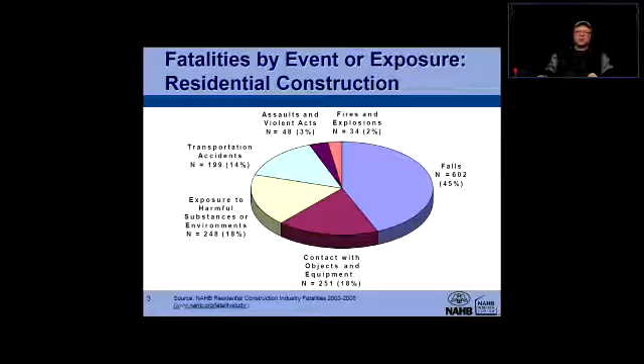So ladders first. All right, overview here. Now, just adjust this size here. Fatalities by event or exposure. This is a snapshot of some sort of statistics. It doesn't matter where it's from, pretty much it goes with everywhere.

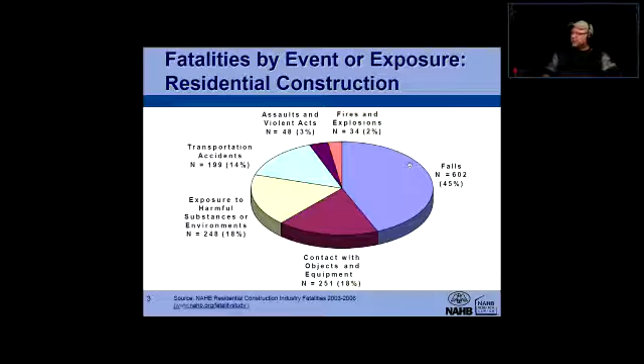Okay, so wherever the statistics are from, you're not going to see much difference. So what do we see here with the statistics? Fatalities, that means somebody died. All right, so falls, look at this, falls are about 45% of all the fatalities in residential construction. It's just residential construction, but it could apply anywhere else as well. So the big chart of the pie takes the falls.

Now, fires and explosions, you've got just 2%, 2% too much. Assaults and violent acts, we get 3%. Transportation accidents, anything involved with transportation, this would be 14%. Exposure to harmful substances, that's not a small piece of the pie, it's about 18%, and contact with objects and equipment, 18%. So that's fatalities, which means basically people have died because of accidents related to these types of events.

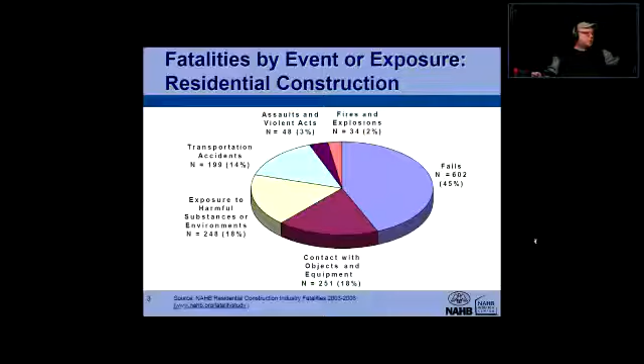All right, so as you can see, falls are taking a big piece of that pie chart. Now we're going to examine just the falls. So we're going to concentrate on the falls right now. So this is the falls.

So now falls from the ladders and falls from the scaffolds, that's what we're going to concentrate on, trying to make you safe, because falls from the stairs, you're using stairs all the time, so you're used to that type of device, if you can call it that.

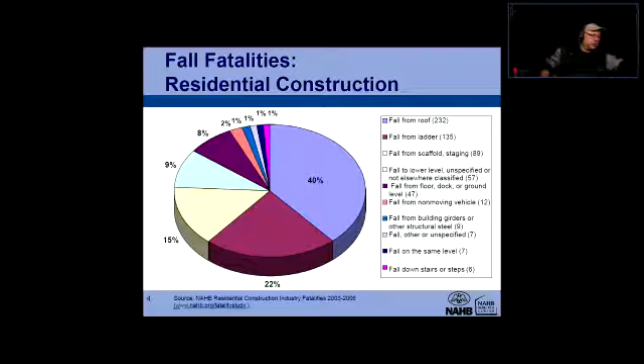When it comes to dealing with ladders and scaffolds, there's a high probability these things are new to you, and if anything is new, you have to familiarize yourself with it. This is what I'm going to try to help you with. So here's the ladders and stairway safety.

Now, common ladder hazards. So the dangers of... I'll be interested in seeing a pie chart about spring, summer, and winter fatalities in residential construction. You know what? Maybe I can find it for you sometime.

All right, so common hazards that are associated with ladders are listed in point form: improper setup of portable ladders, not 3 feet away, not 3 feet above the landing surface.

What is a landing surface? If you're trying to go onto a flat roof and you're going to put the ladder against the wall, that roof you're going onto is your landing space, the landing surface. Also, not securing the ladder correctly.

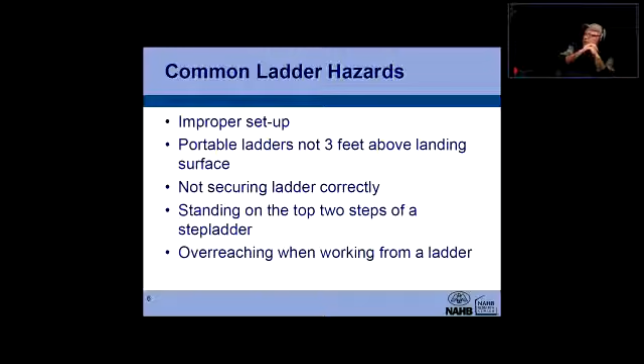Standing on the top 2 steps of a step ladder, and overreaching when working from a ladder. These are the most common ladder hazards, and we're going to go over some of them in more detail here.

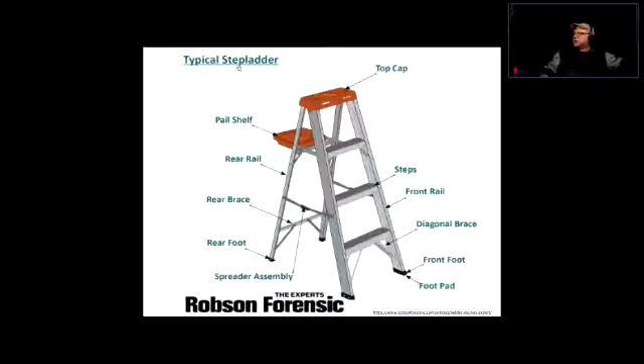First, let's get some definitions set up. This is a typical step ladder as opposed to an extension ladder. That's an extension ladder, and this is a step ladder.

Here's the top cap, right on the top. These are the steps. Here are the braces, front foot, foot pads, rear foot and pads, and here's the spreader assembly. Rear rail - these are the rails. Here's the front rails, here's the rear rails, and here's a pail shelf. And I've got the top cap already. So this is the terminology associated with the step ladder.

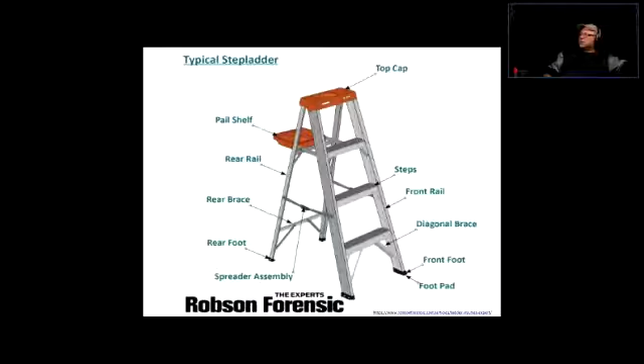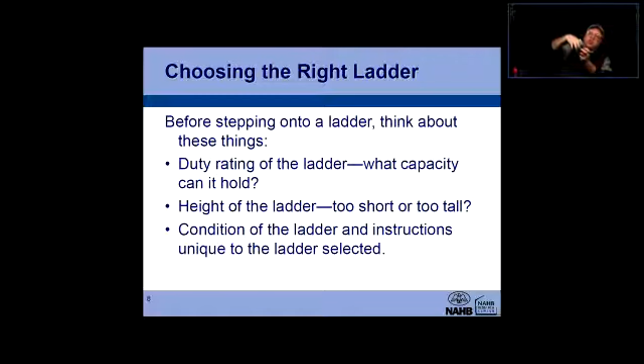I've seen in hardware stores telescopic ladders being sold. They fold down so you can put them in a trunk, then extend them to make a 10-foot ladder. What's the biggest hazard with those? Some of the locking mechanisms will be the weakest point of that ladder. You don't see what's inside those telescopic mechanisms, and if something fails with the locking latches that are supposed to hold it in place as you step on it, that will be the weakest point. That's just an example of familiarizing yourself with equipment and the hazards associated with it.

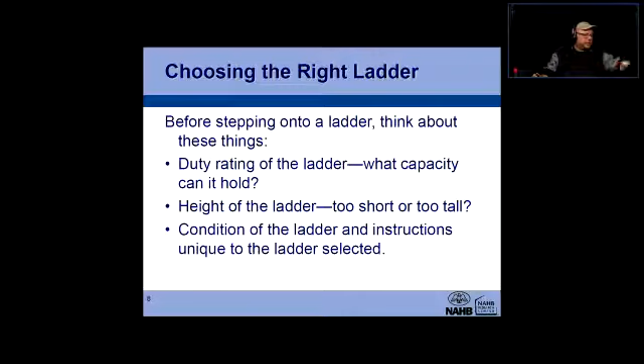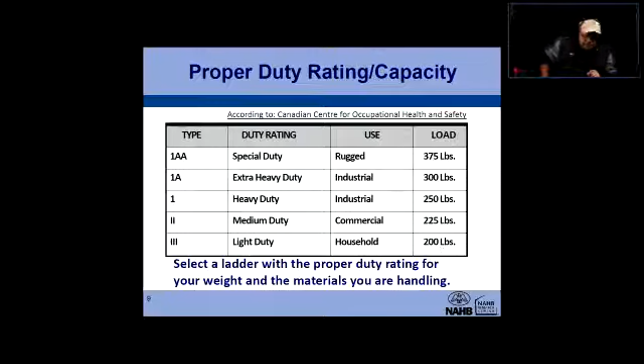So sad to say, I won't be able to use that ladder. Then there's a type 2, medium duty, used for commercial purposes, rated for 225 pounds. So sometimes I can use it, sometimes I can't.

Then there's a heavy duty ladder, industrial use, up to 250 pounds; extra heavy duty, 300 pounds; and so on. Special duty is rated for 375 pounds.

When it comes to buying a ladder for everyday work use, I've seen some people on construction sites using light duty ladders simply because they're easy to carry. When you have to carry that thing around all the time while running wires or installing devices above the floor, sometimes you have to climb on it, and carrying the ladder becomes a task. So some people choose light duty ladders, but they were told not to bring those ladders onto the site, and to remove them so nobody gets hurt.

Yes, sometimes it is heavier to carry. Some of the heavier duty ladders are heavier to carry, but they're much more safer to use, and they don't wear and tear as much as the light duty ladders. Select a ladder with the proper duty rating for your weight and the materials you're going to be handling. So it's not just your weight; it's whatever you're going to carry on that ladder.

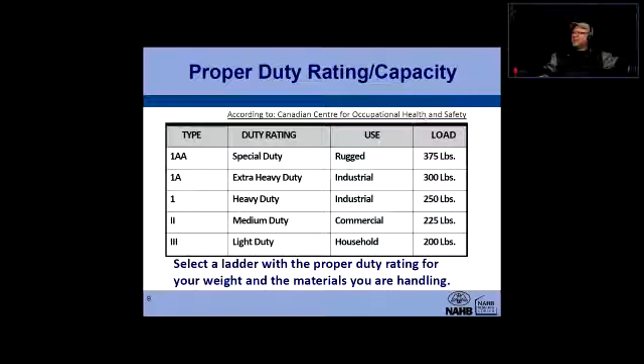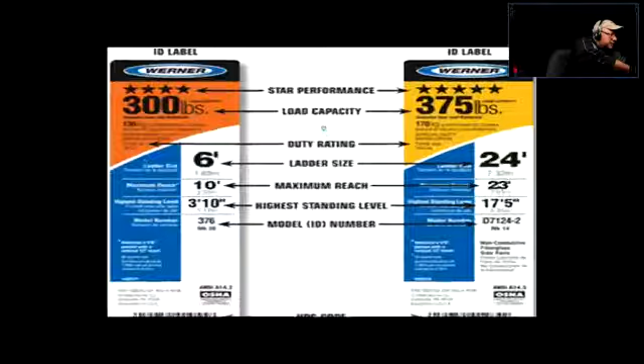You probably won't be able to see that clearly because I have this thing kind of... These are the stickers on the side of the ladders, labels. One is the step ladder ID label, and here's the extension ladder ID label. So you can see the rating with big numbers. This ladder is supposed to handle 300 pounds. That ladder is supposed to handle 375 pounds. Now here's the height of the ladder size. Here, 6 feet, most common size.

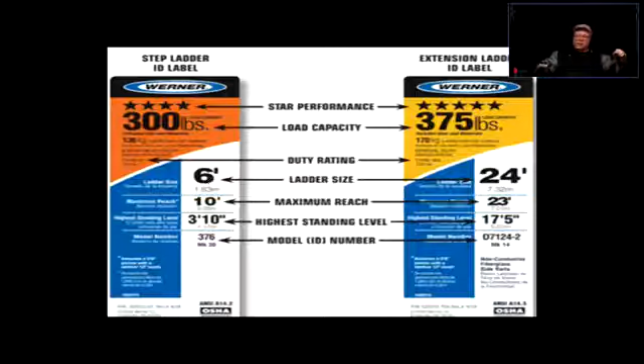Just as a side note, there are two types of basic trainings. One is working on heights, and whenever you go on any construction site, you should have the working on heights, so-called ticket, which means you have official training, you pay money for it, and somebody certifies you as trained. Whenever you're walking onto a construction site, the first time you're there, they register everybody who's working there, and everybody who is going to work on a specific site has to go the first day. They designate a safety training, and there's a safety officer on site who will sit you down in a room, play you some videos about safety, and you have to demonstrate a little bit of knowledge based on what you've learned, and then they register you as legit to work on that site.

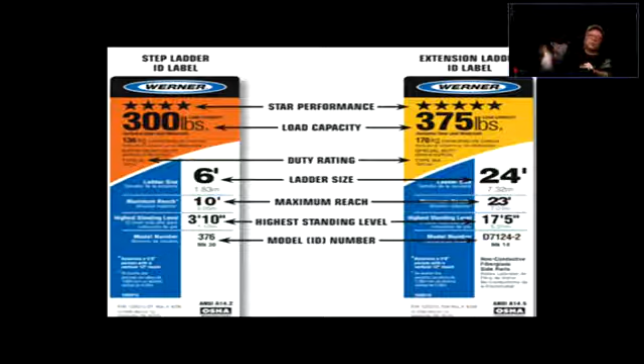It used to be called fall arrest, which is basically preventing you from falling. Now it's called working on heights. Maybe within 5 years it's going to change 3 times, who knows, maybe not. Every year or so the requirements change as we go along. So that's one thing, basically working on heights.

The other training used to be called lift ticket, maybe it's still called that. Basically that's using mechanical devices such as scissor lifts, man lifts, or boom lifts. I think the highest one produced for that type of use is 180 feet high, so that's quite high, and since you're operating a mechanical device, you should know something and be trained in order to do so. Now if you don't have the lift ticket, then you're not allowed to use that lift, which makes you less valuable as an employee.

If you're considering a career in this type of field, you should start searching for companies who train. Where do you search? Well, a lot of equipment rental companies offer on-site training for that. You have to pay money for it, but they do offer it. And if they don't, they'll be able to tell you who in your area offers that type of training. So that's the lift ticket.

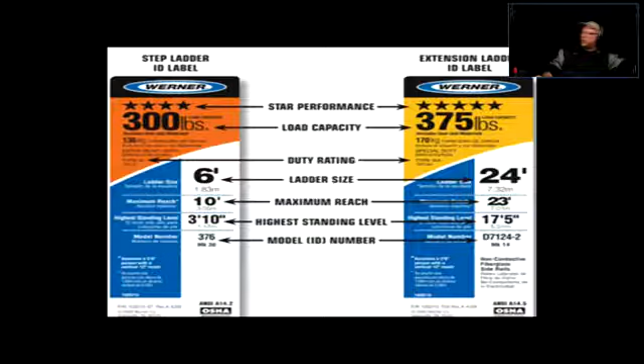And other ways, lifting devices. Let's see the time, okay, we're still good. Oh, whoa, whoa, whoa, all right.

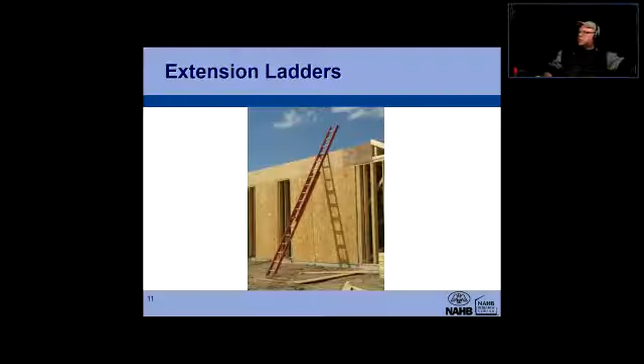So as opposed to a step ladder, which is this, we're going to look at something that's called an extension ladder. All right, that's what an extension ladder is.

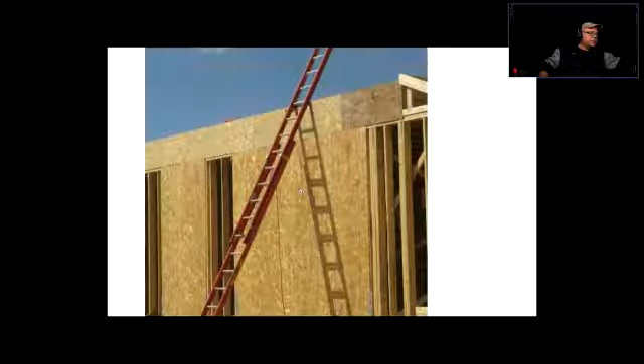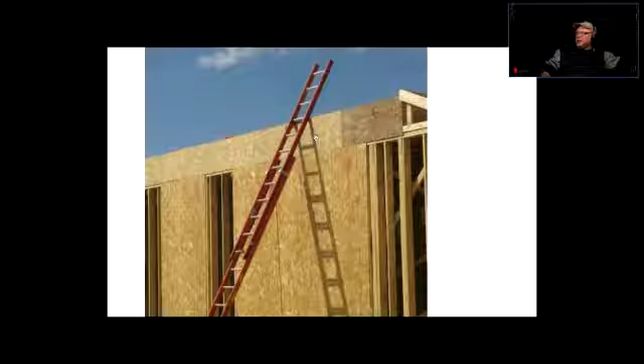And of course, if somebody is walking onto the roof, this would be the landing area, right? Notice how this ladder is positioned - not just tall enough. It has to have a certain amount of feet above the landing area for that thing to be safe, legit, or legal, for that matter.

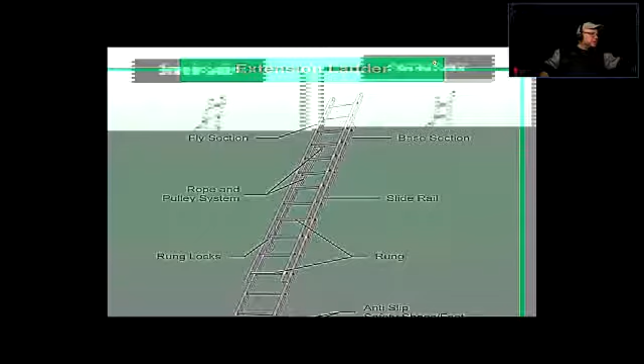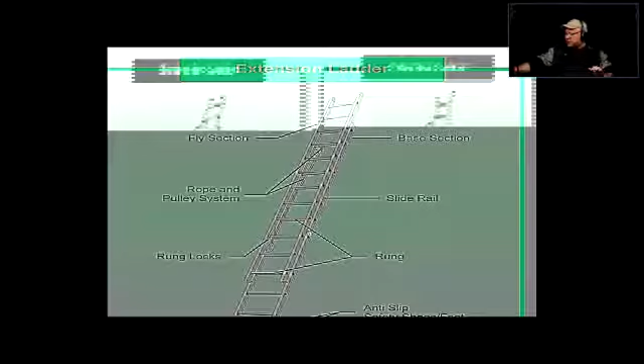Okay, so the parts of the ladder. Here's the fly section. So the extension ladder is basically like two ladders coupled together, right? And then you can extend one part to make this thing longer or shorter. That's basically how extension ladder works.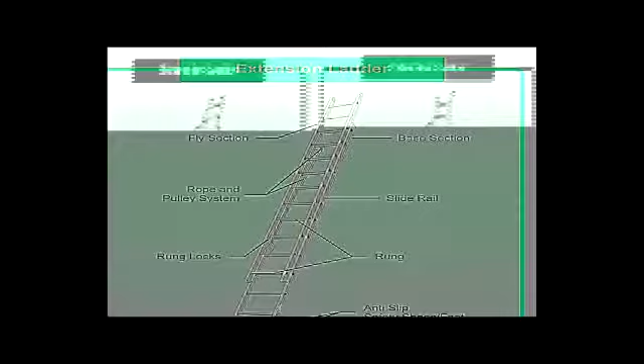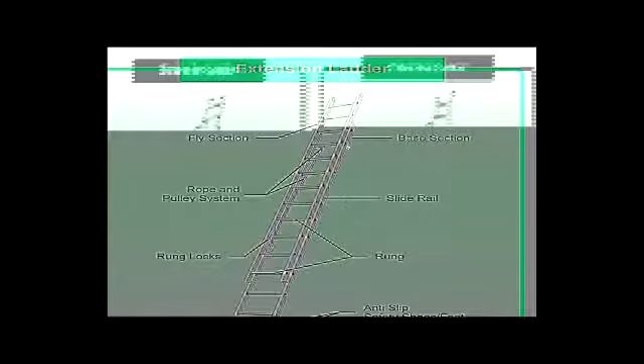So the bottom part - here's the base section, the one that is on the bottom, that's not moving. And then there's the sliding part, which is called the fly section. So here's the base section and the fly section. And these little steps here that are extending between the rails, they are called rungs.

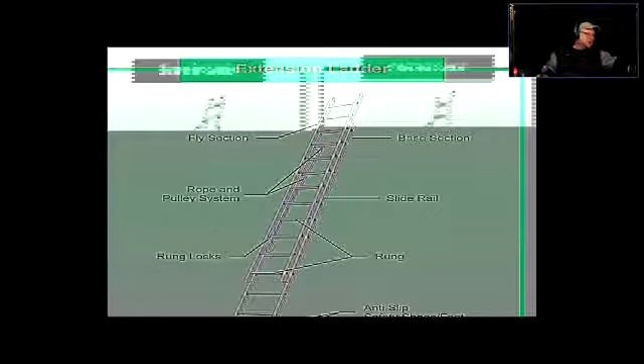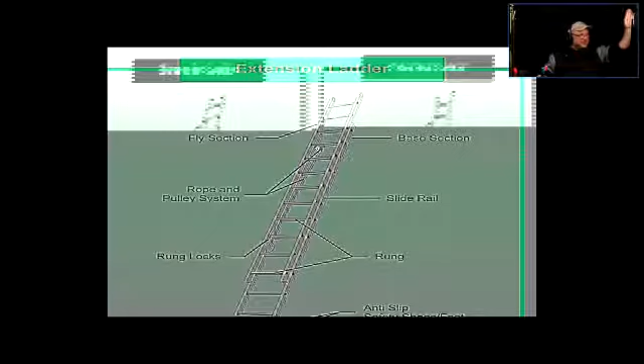And how do you extend that extension ladder? You use a rope on a pulley. There's a pulley system, so you pull the rope down and it just goes around the pulley. And that's how you use the extension ladder.

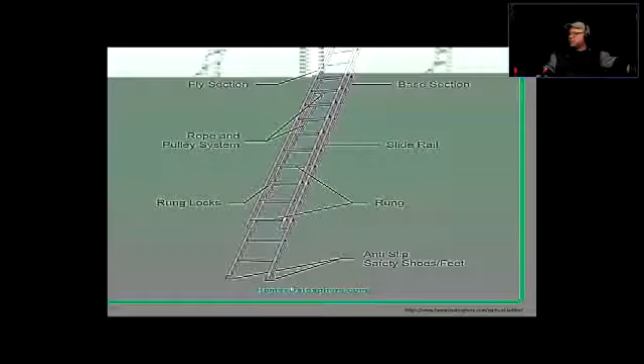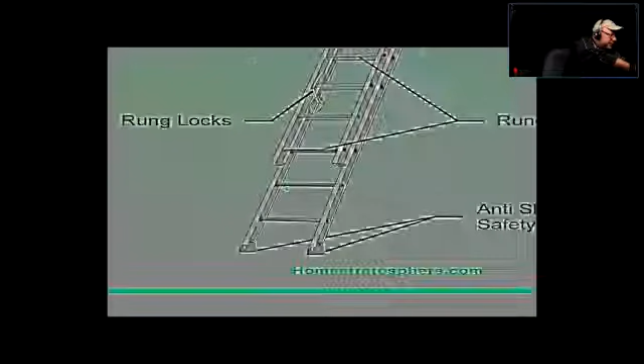So these are rungs here. Now, there's also an important thing here that's called anti-slip safety shoes - basically those little devices here that make it look like the ladder has feet. It's a blurry picture - something got lost in translation when I was converting it from PowerPoint to PDF, but you'll have a better picture there.

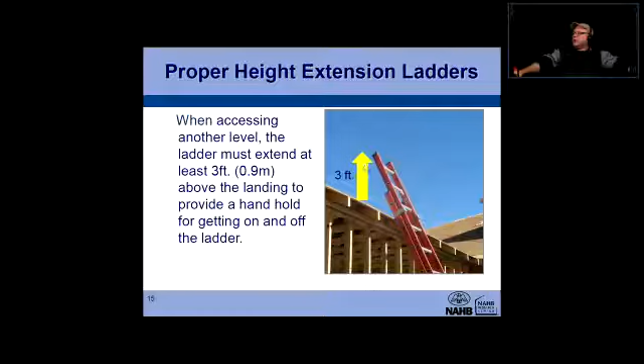All right, proper height for extension ladders. When accessing another level, the ladder must extend at least 3 feet or 0.9 meters above the landing to provide a handhold for getting on and off the ladder. 3 feet, right here - that's the safety rule.

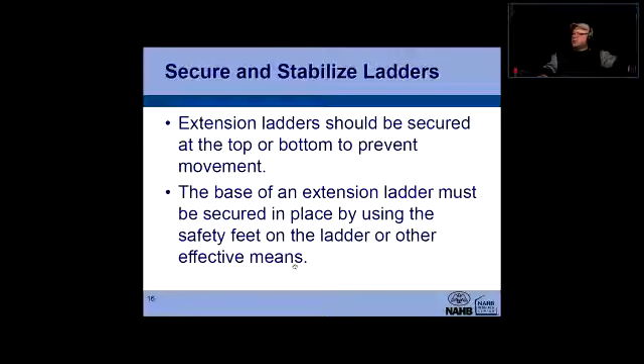Secure and stabilize ladders. Extension ladders should be secured at the top or bottom to prevent movement. The base of an extension ladder must be secured in place by using the safety feet of the ladder or other effective means, depending on the situation. This should be top and bottom.

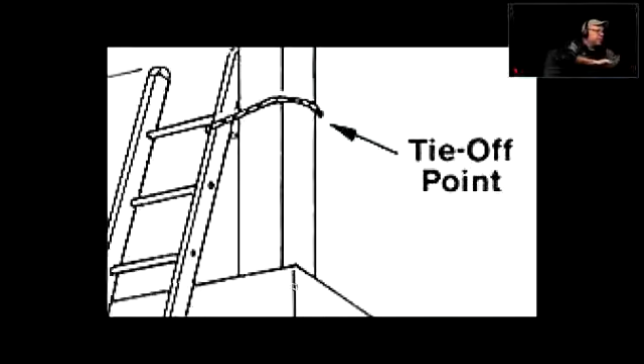So here is an example of securing the ladder at the top - here's a top tie off. Do we have a thing here at the bottom? No, there's just the feet here. So this picture talks about the top of the ladder here, right, and the bottom.

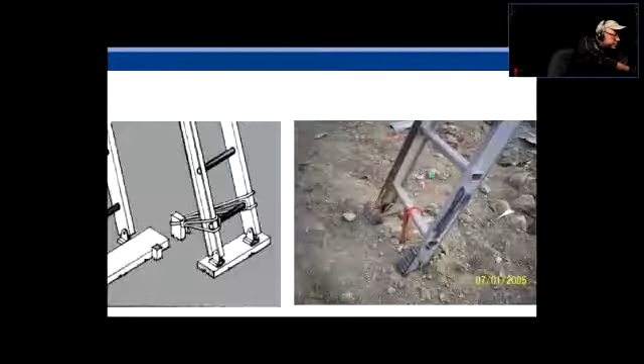This is wrong. Okay, this is very wrong. Ladders can slip. First of all, this ladder seems to be damaged here, and somebody just used a rock to support that, and that is quite a dangerous situation.

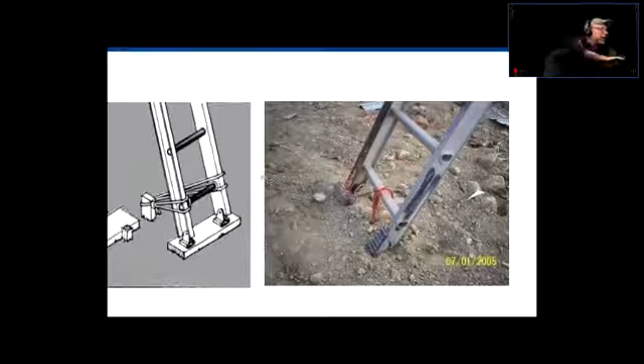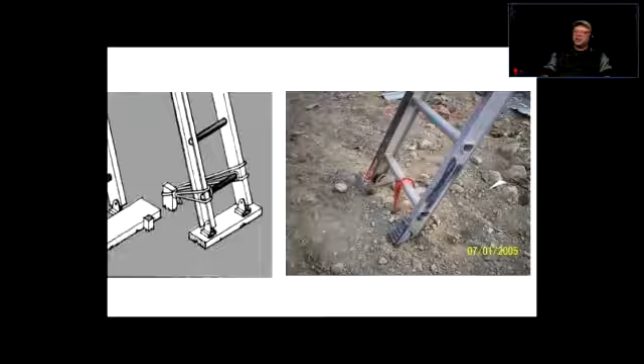And I'm not talking about just from the stories. I have first-hand experience more than once. Not me falling off the ladder, but I have seen people not securing the ladders properly in this type of scenario. And let me tell you, when somebody falls from the ladder, and it was not that high, it was just like 10 feet, somebody loses balance, the ladder falls. A human body is heavy when it hits the ground, and it's not a very pleasant sound.

Fortunately, all the falls that I have seen, nobody died. Some people got hurt in a certain way, but those things are real.

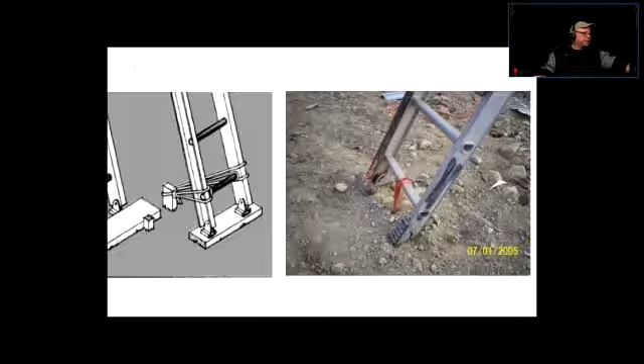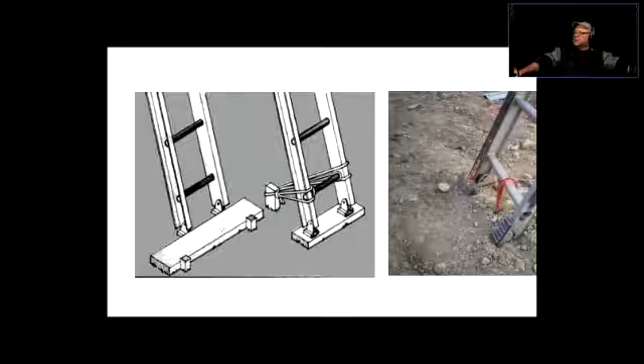So here is an example of properly securing ladders on the ground. You don't want this thing to slip. If it's muddy ground, put something underneath, so you compensate for the sinkage of the muddy ground. There are a couple examples of how to do that. But you have to use common sense and whatever is available legally in order to legally obtain the safety that you need.

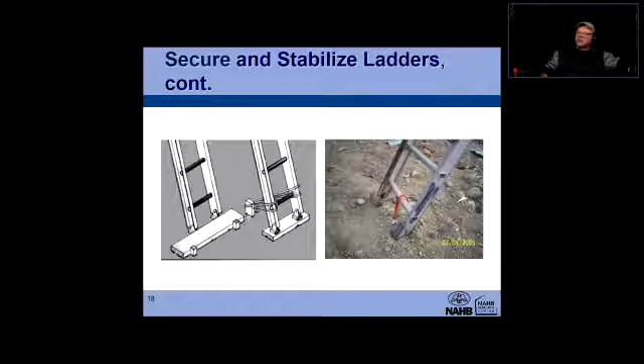Now, other elements here. On the left we have a stabilizer. Now, of course, you're covering a greater area here to rest the ladder against something, so you have a greater center of gravity possibility of the ladder not falling.

Now, I'm not sure if you've seen this in physics class or not. There's an interesting experiment with a rectangular shape, not a prism, whatever that thing is called from math.

If you put a level here, a plumb line, and let's say you adjust the length of it to find the center of gravity of this shape. Help me out with this shape, I'm losing my mind. It's a rectangular, but it's not a prism. The prism would be that way.

So anyways, if you keep tipping it over, the center of gravity, if it's still within the base, that will be the base of it. If the center of gravity on the little string is still within the base, then you are maintaining the balance of it. If you tip far enough that the center of gravity finds itself beyond the base, it falls.

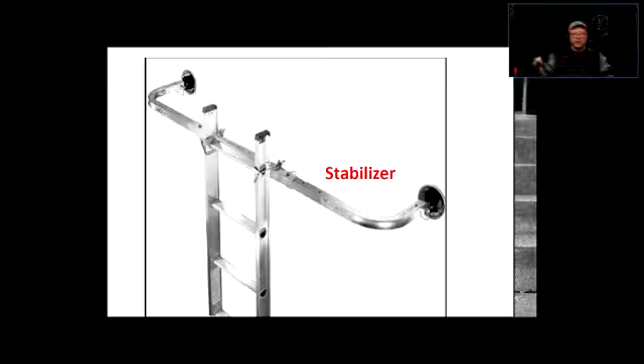Now, where is your center of gravity as a human being? The best way to describe it is that's where your belt buckle is. That's why when it comes to reaching over to the side, left or right, sometimes you're going to be tempted to just say, okay, well, I have to come down, move the ladder and climb up. That takes time and I want to go home, it's late already.

Well, that's when accidents happen, because if you just try to overreach, it doesn't take much. Your center of gravity goes beyond whatever the base of the whole system is, then you're going to fall. There's no ifs, ands about it. It's just that when your center of gravity goes beyond the base of the system, you are going to fall. It's just how physics works.

These stabilizers give you a little bit of extra protection, but do not quote me on this, because yes, technically it will give you a more stable area to work with, so you can reach a little bit further, but I don't want you to get into an accident and say, oh, Bach told you that you can reach further when you use these. No, you should never allow your belt buckle to go beyond any of those rails.

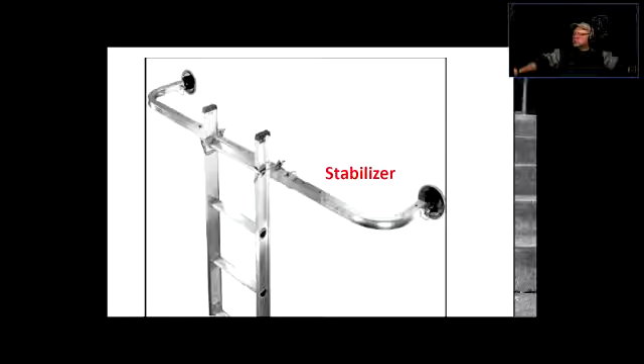Whenever you're reaching, you just don't hold on... you just hold on through, which means I keep holding the ladder, and when it falls, yeah, but you're still falling.

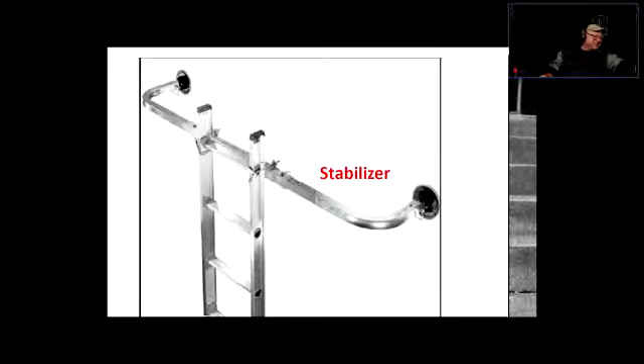Let's see here. Timing, we're still good. I'm gonna have to go back to some of the slides. Okay, step ladders. So we were talking about extension ladders, now we are talking about step ladders.

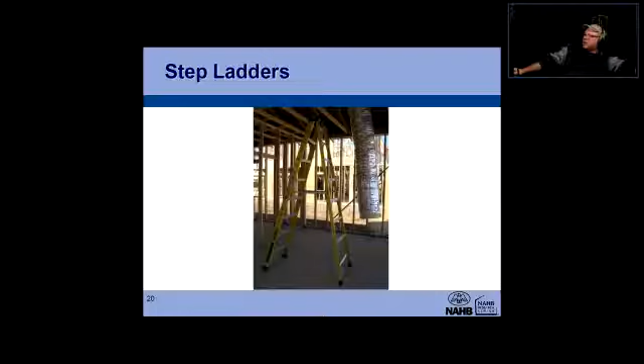Step ladders should only be used in the fully open position on firm level ground. Sometimes what people do is take the step ladder, extend it like this, and use one side to step on and the other side they don't. Some people fold it and put it against the wall in order to climb it. Don't do that. It's not safe. It's not designed to do that kind of thing. It should be fully opened.

Do not use a step ladder that is folded or in a leaning position, which I just told you.

Can you rephrase the question, Chris? I'm losing some of the logic there.

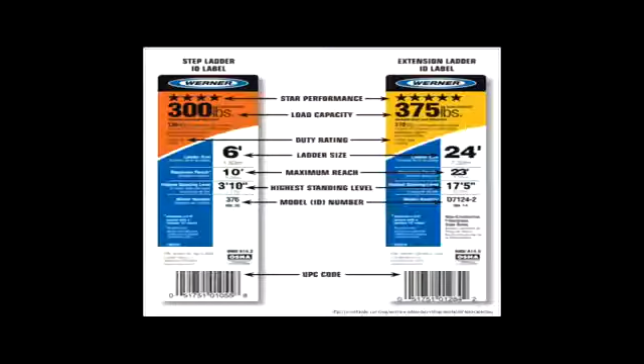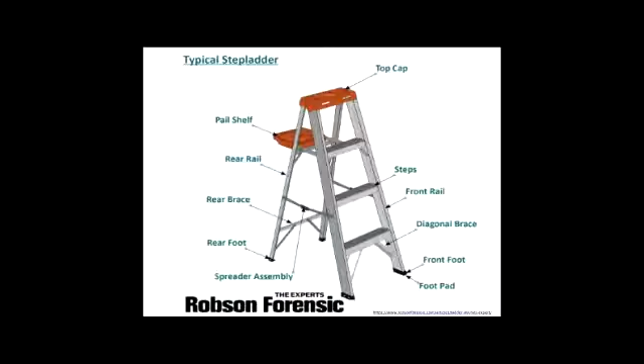Consider work height when selecting a step ladder. You should be comfortable. If you're not 100% comfortable when working on a ladder, here's what I've done many times: sometimes I'd be working on a ladder, sometimes using a scissor lift, and sometimes a boom lift that gets you quite high. And sometimes when you haven't used that equipment over a longer period of time, maybe a couple months, and you're required to do a job that requires you to lift yourself in a boom lift, for example.

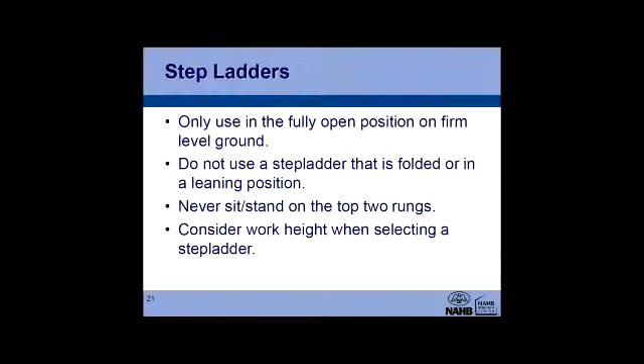Whenever I would feel not 100% comfortable, I would just get myself to the height or position where I'm supposed to do the work, and I would do nothing for a minute or two, just to familiarize myself with the new surroundings - the world looks a little different when you're high up than when you're standing on the ground. So just get your bearings, get your brain used to it. You'll be much more comfortable when working. If you're not comfortable, you're not safe. If you're comfortable, sometimes being too comfortable can lead to an accident, so there's a balance. But if you're not comfortable, you're definitely not safe.

That's just a little advice I'll give you when it comes to working on heights - consider the height. So whether you're using a boom lift, scissor lift, or any kind of ladder, you should be comfortable up there.

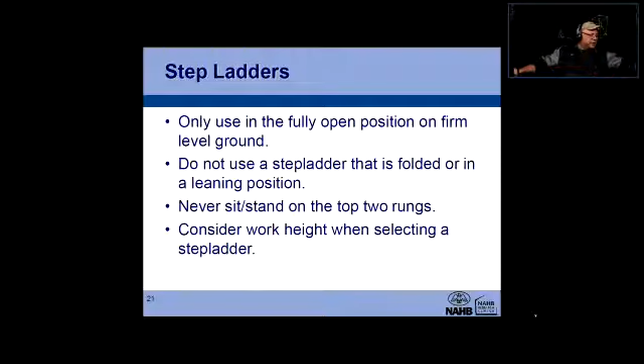Maintain a safe position on the ladder. Face the ladder when ascending or descending - do not face it backwards and use it like a stairwell. If the safety officer sees you on a construction site, they walk around and pay attention - that's their job, that's all they do. You'll be kicked off the site, if you're lucky not to fall. So face the ladder.

Maintain three-point contact. I've never gone to climbing school, but in climbing, like scaling a wall, you should maintain three points - either two hands and one leg minimum, or four is best: two hands and two feet, or two feet and one hand. So three points - you should never detach more than one limb from whatever you're climbing.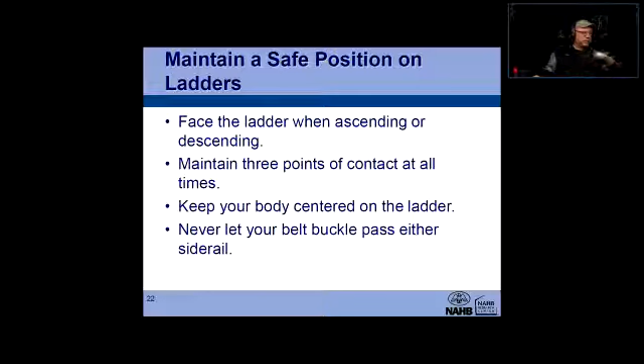There's the last one here - never let your belt buckle pass either of the side rails. That comes down to center of gravity. Your belt buckle is your center of gravity. If your belt buckle goes beyond the rail, your center of gravity is beyond the system, and you will fall. Not maybe - you will fall, and the whole ladder is going to tip. That's maintaining a safe position on the ladder, continuing.

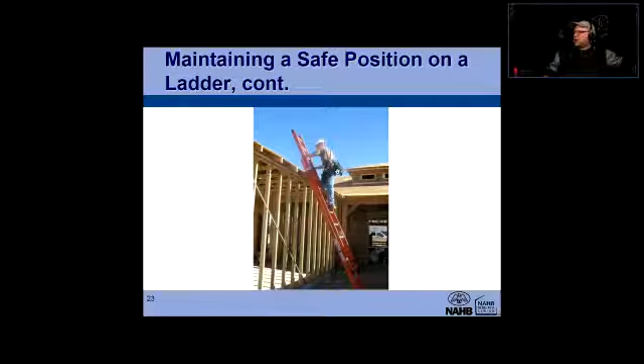Well, what can we see here? We see a dude climbing the ladder. He's got 4 points of contact, and at any given point, he's going to detach one limb, either foot or hand. He's not carrying any tools in his hand.

All the tools are in his tool belt. Or the best way of getting your tools up there is using a bucket or some sort of box on a rope. So you put your tools there, you climb to the landing surface, and you pull things up.

Why am I telling you this? Why am I so serious about this? Well, I am serious because I have seen people fall. Until you see that, you could maybe make some jokes or whatever. But after you've seen one or two falls, it kind of takes the smile off your face, even when you remember that. It's not a happy situation.

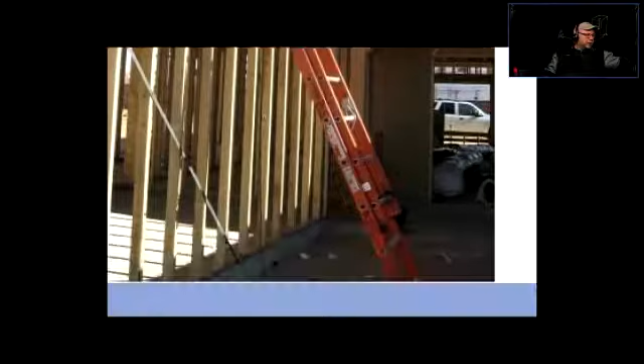Another thing I'm going to tell you here is choose the type of ladder. If you're working with electricity on electrical systems, do not use aluminum ladders. They are conductive. You can get electrical shock because you are using that type of device. Use the fiberglass ladders.

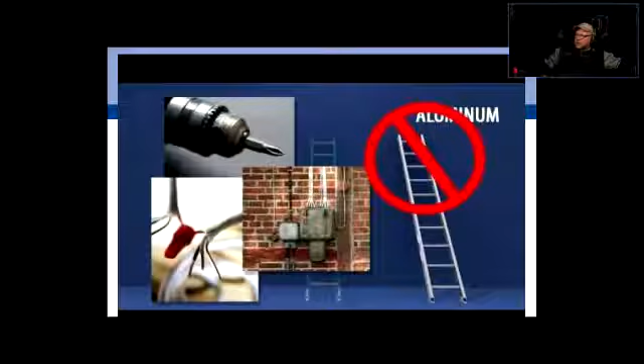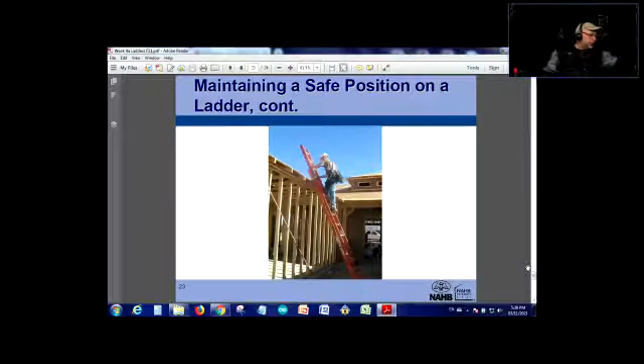So that's as far as the slides that have to do with the ladders. Let me just see here if we have time to expand on some of the first slides that we did.

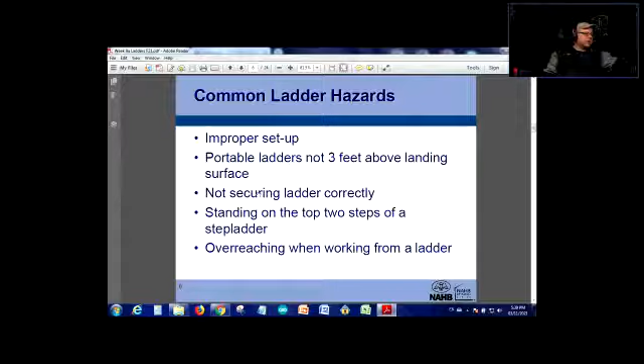Improper ladder setup, portable ladders not extending 3 feet above the landing, so we covered that. Not securing the ladder correctly, so this is the common ladder hazards. Standing on the top 2 steps of a ladder, yeah, we covered that. And overreaching. Now, after we've gone through that, when you read this again, it's going to make more sense because you have some reference to it, since we talked about it.

So when it comes to step ladders, you should only step on the designated area to be stepped on. The other part is just to keep the balance, you do not stand on that, you're going to collapse the ladder. You definitely do not stand on the pail shelf. This is for painters, it's called a pail shelf, but you can put other things on it.

Just keep in mind that whatever you put on any kind of elevated device, remember there are people walking underneath you. That's why in our lab room, the cubicles upstairs that we're using for practicing connecting or installing things, there's that rail there. I always tell you not to put anything on top of that rail.

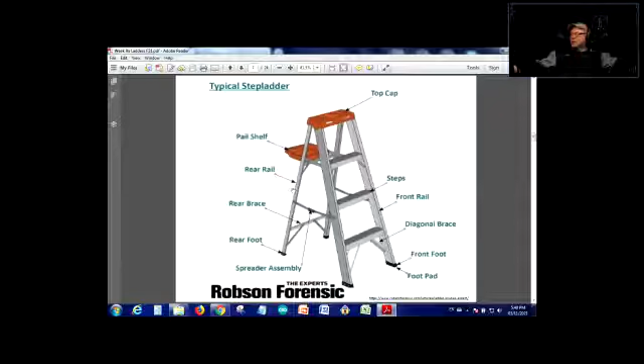Get the safety sense in you. It's not practicing, it's for real. You put something on top of that rail, you can knock it off with your elbow once you turn around, and it is going to land on somebody's head, and it's going to hurt somebody. So, you know, we're doing the real thing.

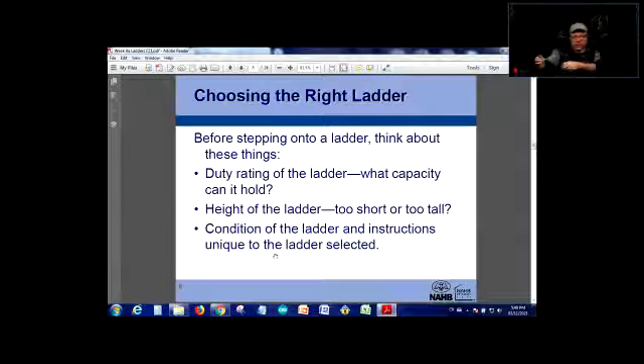Now, this is your life in your own hands. You are stepping on that, and if this ladder is not in a good, proper, safe condition, if it's worn out — they do get worn out, they do get damaged, they do get used up, they wear and tear — at some point you just have to say goodbye to your ladder and get a new one.

So if there's any kind of damage, the ladder is deemed not safe, and if you get into an accident, you may have a problem with your insurance as well, because it is your responsibility to use the equipment correctly.